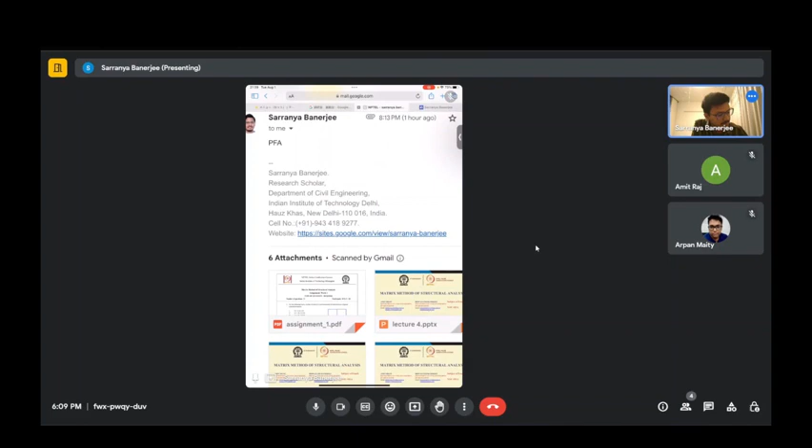First, I would like to introduce myself, and what better than my own web page that I have created. This is the web page where I have given details of what I am doing, how you can contact me, and so on. You can note this web page and try to contact me through it also. I am Sarranya Banerjee, a doctoral research scholar, Prime Minister's Research Fellow to be more precise, in the Department of Civil Engineering at IIT Delhi.

My area of specialization is structural engineering, as you might have already guessed. My research revolves around various vibration control strategies for structures against multiple hazards like earthquakes and winds. Right now I am in Toyohashi City in Aichi Prefecture, Japan, where I am conducting research as part of an exchange program between IIT Delhi and Toyohashi University of Technology, facilitated by the Suzuki Foundation.

This is my contact information. You can find my institute email ID and my personal email ID here. You can email me in case you need any information related to structural engineering, civil engineering, and academics.

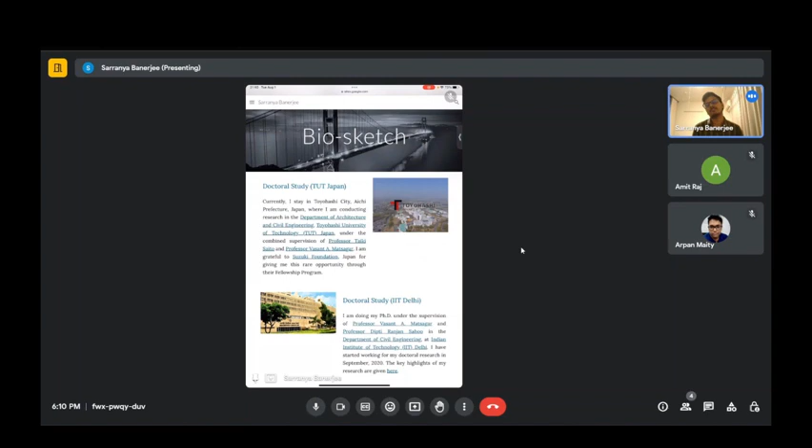This is my bio sketch. Currently I am doing my doctoral study under the supervision of Professor Vasant Matsagar and Professor Dipti Ranjan Sahoo in IIT Delhi, Department of Civil Engineering. I started my doctoral research in September 2020, and from April to October 2023, for 6 months, I am staying in Toyohashi City doing research at Toyohashi University of Technology under the supervision of Professor Taiki Saito.

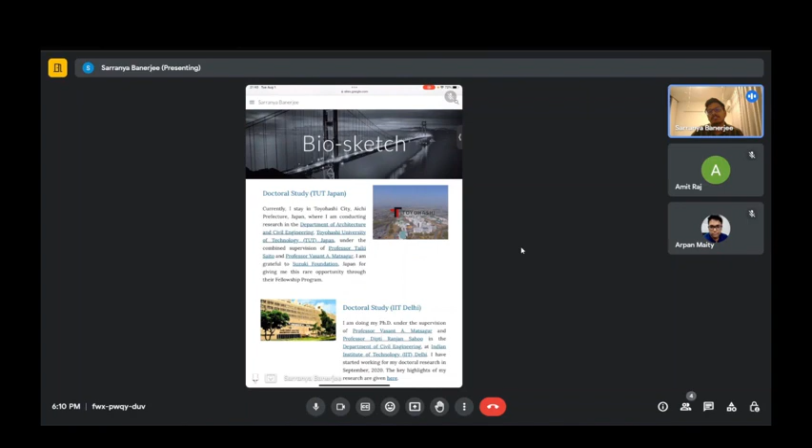I have received some awards during my doctoral study, including the Suzuki Foundation Fellowship, due to which I am currently in Japan, and the Prime Minister's Research Fellowship, for which I am conducting this online live session with you all, along with some other awards. I also have 3 journal publications and 3 conference publications so far, with some others currently under communication.

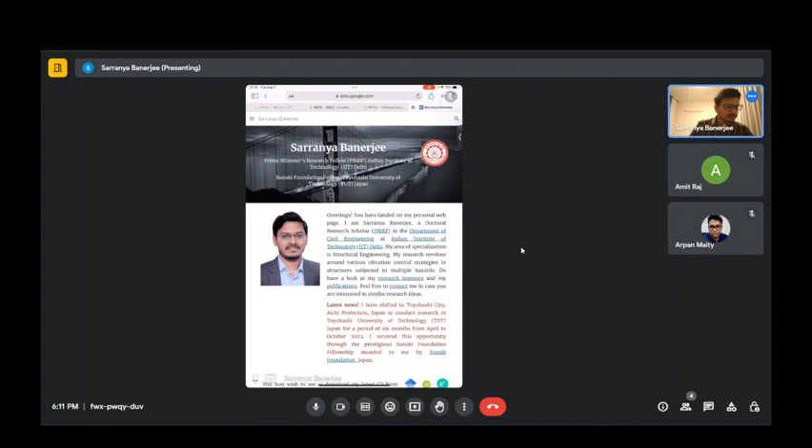My broad areas of research are structural dynamics, vibration control devices such as seismic isolation devices and tuned mass dampers, and multi-hazard engineering including earthquake engineering and wind engineering. None of this is directly related to this course; however, these are my broad areas of research, and as always, we have to be very strong in the basics of structural engineering, like matrix methods in structural engineering, to study further in these areas.

I'll stop my screen share for a moment now. I would like to speak to you about my expectations from these live sessions, and I would also like to know from where you are joining this meeting, what you are doing, and what your expectations are from this course and this live session.

As the name suggests, this is called the live interactive session for the course of Matrix Method of Structural Analysis. So the first and foremost thing in this course is that it will be very interactive. I will always be coordinating the meetings, but I would like to get inputs from your side. I will give some problems and we'll solve them together.

I expect that you have a notebook in front of you right now where you can jot down the problem and try to solve it. I'll give you 1 or 2 minutes to solve the problem, and then we'll solve it together for the whole class, so that you get an idea of where you will get stuck during solving.

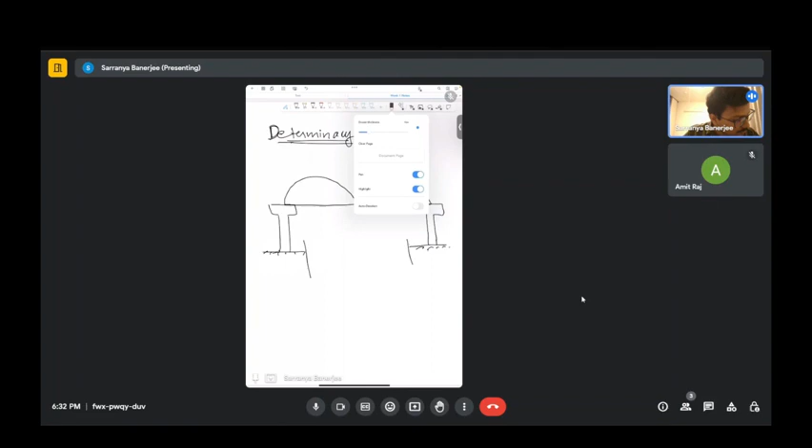Before I start explaining this beam problem, I would like to talk about this in a more practical sense of view. So this is a two-dimensional view of something I have tried to draw here. Can you tell me, Amit, what I have tried to draw here from this figure?

To make things easier for you, let's extend this drawing.

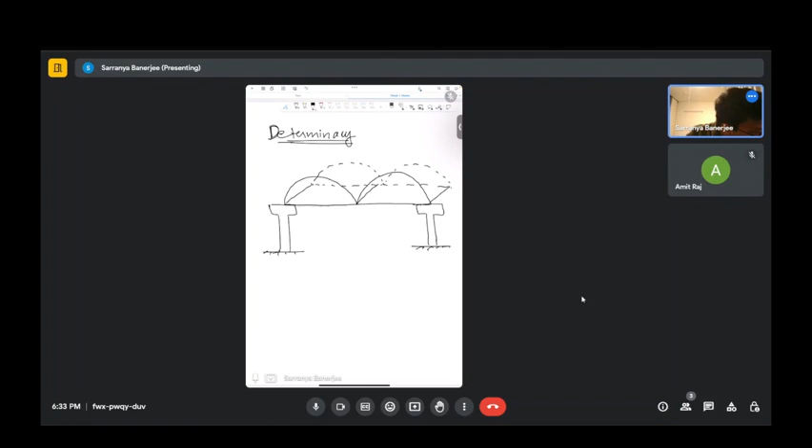Now can you guess what is the thing I have tried to draw here? A bridge structure, right? Yeah, any specific name of this bridge? Arch bridge. Yeah, this is an arch bridge. So how beautiful do you think arch bridges are? Very beautiful, right? Yes, looks very good.

Whenever we look at some arch bridge, usually the thing with arches is that they are from very ancient practices of civil engineering. So most of the arch bridges are usually very historical in nature. Nowadays very few arch bridges are made because there is a larger requirement of material. Cable bridges are much stronger than arch bridges, but arch bridges always have that historical aspect with them, that is why they are so beautiful looking. So say this is an arch bridge, right?

Yes, absolutely. So now there is a very fine detail in the arch bridge which you will find if you try to see very carefully, very closely, if you get to see any arch bridge properly. So you'd see at the end there are some rollers. You will not get to see this very often, but if you have a close, objective look, you can see there are certain rollers in bridges at some ends.

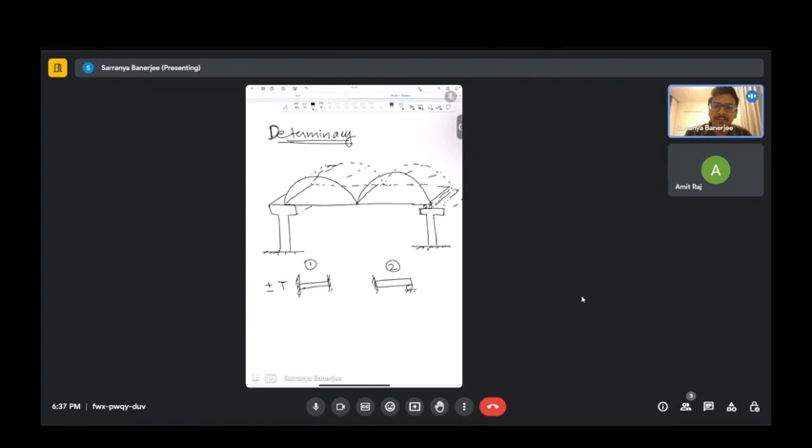So now we expose these two beams, beam 1 and beam 2, to air, like temperature loads. Sometimes we heat it, sometimes we cool it. We are doing it explicitly for these beams, but actually this is happening in a real life bridge. In the night time or in the winters it is getting cooled, in the daytime, in the summers it is getting heated. So now what will be the difference between the performance of these two beams? Which will perform better? What do you think?

The one with the roller. In which roller is provided. But why is that? Because the roller will allow deformation or movement in the horizontal direction. You're absolutely correct. It will allow movement in the horizontal direction. So if there is a plus T, say for example an increase in temperature, the beam can expand like this, and the roller facilitates that. If there is a decrease in temperature, the beam contracts like this, and the roller facilitates that too.

So now what is the problem with this beam then? Both ends are fixed. Yes, so it will not facilitate the contraction and expansion. So a crack may develop, or something else may happen. Absolutely correct. So if we take the free body diagram of this beam, or even this beam, both beams...

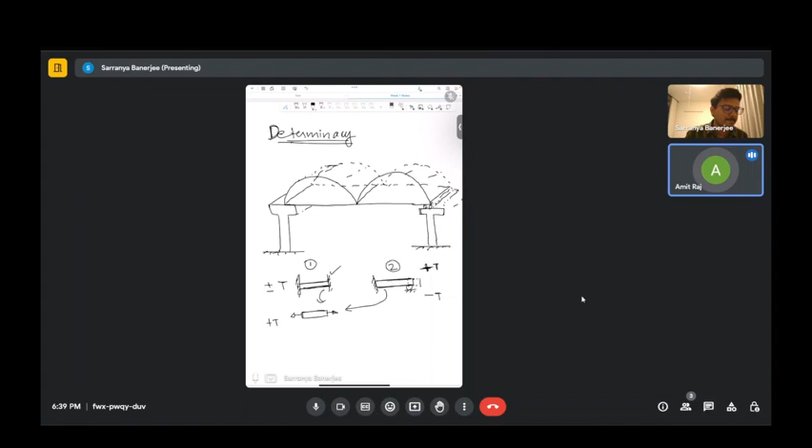So if it is exposed to say plus T, an increase in temperature, there will be a tendency for this to expand in the axial direction. Why the axial direction? Because thermal expansion will occur in the longitudinal direction, along the longitudinal direction. Exactly. So since this is a beam structure, this is a longitudinal member.

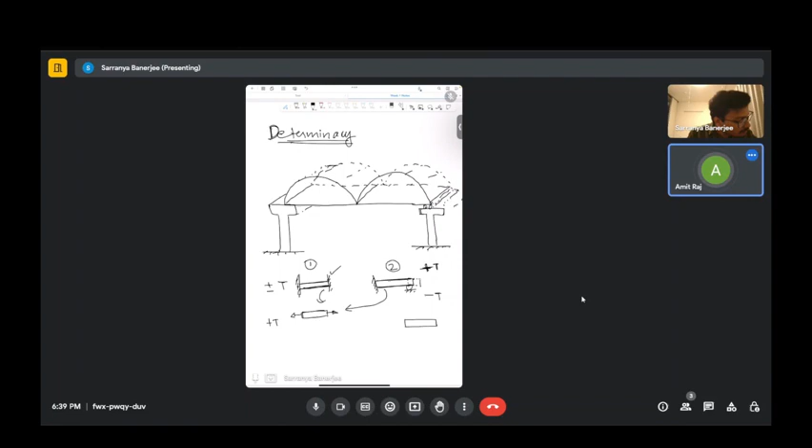If we heat a longitudinal member, it will expand in the axial direction. If this would be a plate, a planar member, it will expand in both directions, 2D. Similarly, if it is a cube, it will expand in three directions.

So now the beam is getting expanded in the longitudinal direction due to the temperature change, but these fixed joints are actually resisting this. When this resistance happens, lot of stresses get developed in this region.

What is stress? Stress means the internal resisting force per unit area. So now if there are some forces being developed here due to the rise in temperature, there will be stress developing here, which will actually impact the axial resistance of the beam.

So the beam has to be made stronger to carry these extra loads, which is not required in this case, because there is no horizontal force acting in this area. So there will be no stresses required in this area, and similarly the stresses here is also reduced because it is free to expand in one direction.

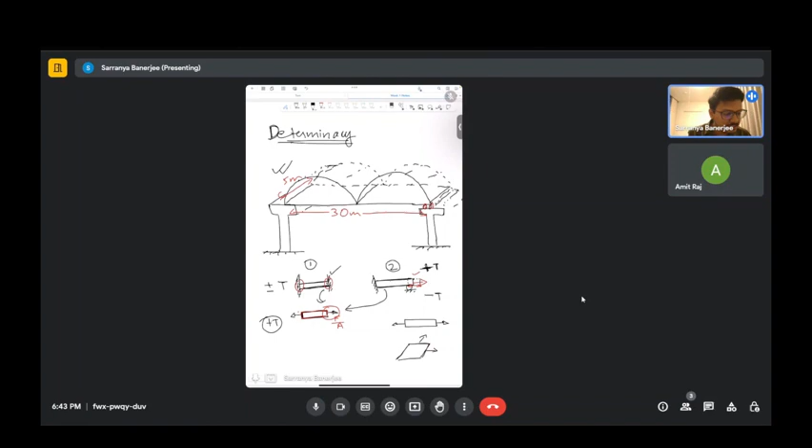So now we are idealizing this as a longitudinal member, and here we are making this as a pinned support, and here we are making this as a roller support. So now what kind of loads will be acting on the bridge?

The first load would be the dead load of the bridge itself. Second, live load and dynamic load due to various loads due to the vehicle. Say this vehicle is a big truck vehicle which is moving on the roads, so this will have a very big load. Then a small vehicle, a small load. So there are various loads on the bridge, right?

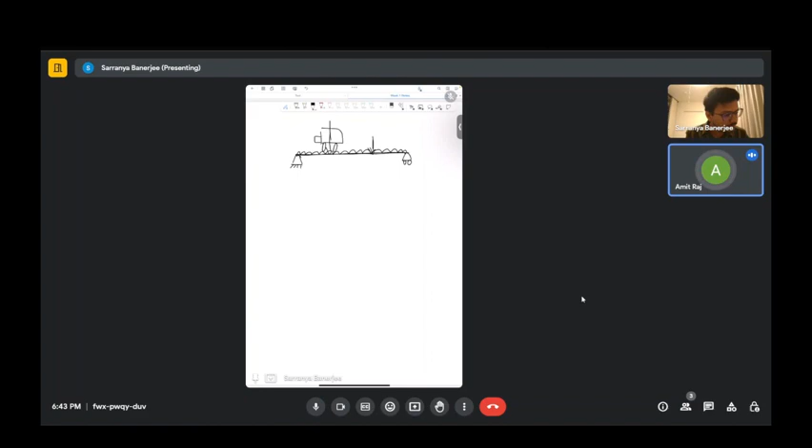So now we have already understood that this is an idealized representation of a simply supported bridge structure where we have various loads acting on the structure. Now, as a designer, when you want to design the bridge, you have already idealized this from the point of view of structural analysis. But as a designer, what do you want to know about this bridge due to these specific loads, so that you can design the bridge?

What? Yeah, I'll repeat my question. So, have you already completed the reinforced concrete design course or any steel design course in your curriculum? No, not yet. But I think in the current semester you will be having the reinforced concrete design course, right?

Next semester? Fifth or sixth semester? Currently, I'm in fourth semester. Yes, sure, no problem at all.

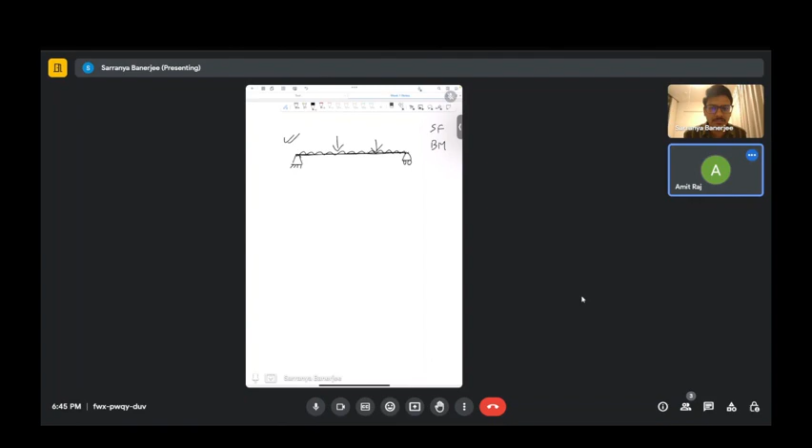So now let's first understand the designer's perspective to designing structures. Right now we only have knowledge of how to analyze the structure and find forces, shear force and bending moment, right? But why are we interested in shear force and bending moment? That is not yet clear to us. So let's go a little bit back to basics of the design of structures.

So now I have already idealized this structure as a...

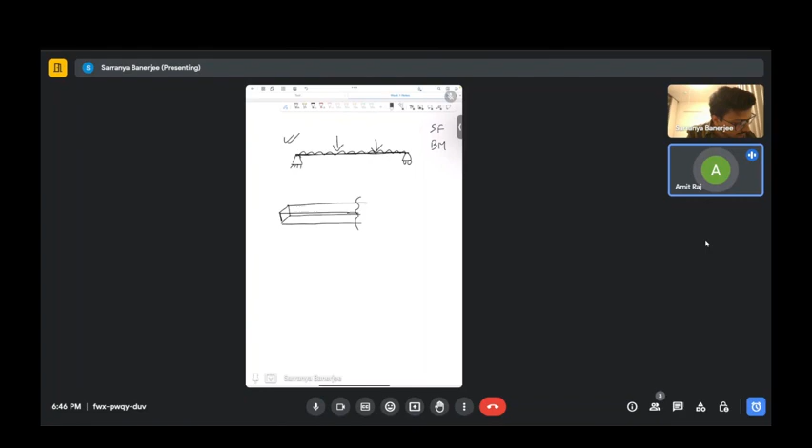Sir, you are currently in Japan. Yes, currently I'm in Japan. Right now the time here is 10:15 in the evening, in the night.

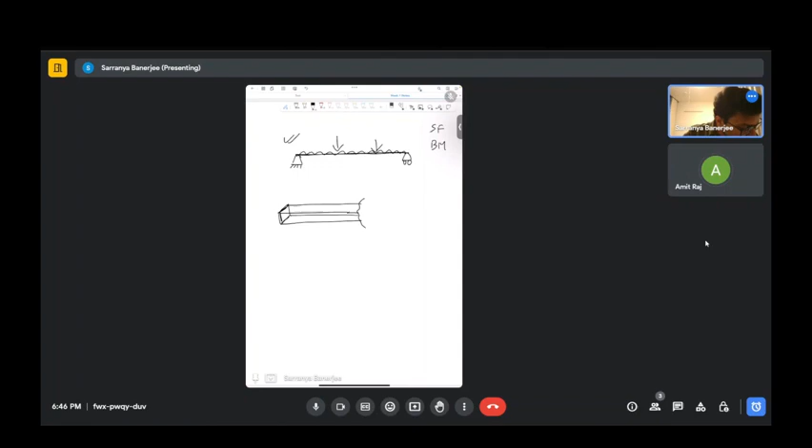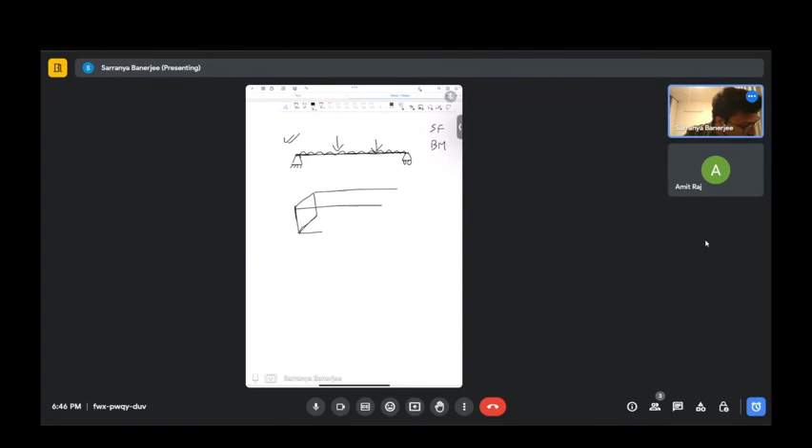So anyways, coming back to our discussion, I'll just draw this again. I'll draw a bigger section of the beam. So this is a beam section, right? A rectangular beam section, do you agree? Yes. So first, for structural analysis, we have idealized the longitudinal section to a single bar kind of element, right?

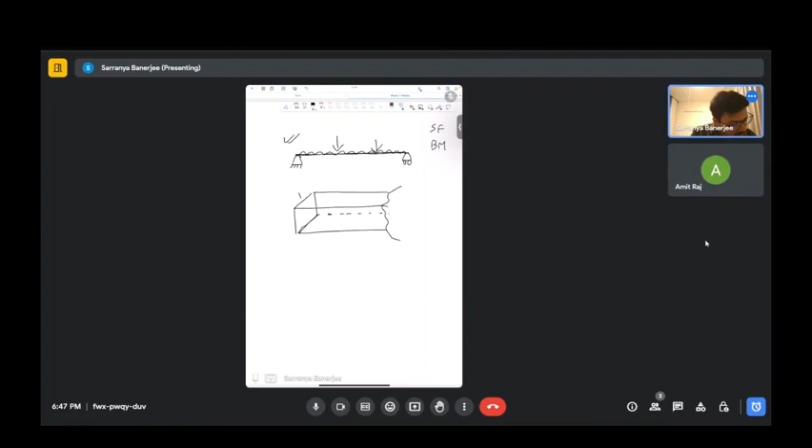Yes. But now for structural design, I want to move one step backwards, and I want to know what are the dimensions of the beam. What is its length? What is its depth? Depth of the beam and width of the beam. I want to know that.

Now why do I want to know that? So we were talking about calculating shear forces and bending moments, right? So how does shear force act on the beam? Any comment on that? Parallel to cross section. Parallel to the cross section. Excellent, yes.

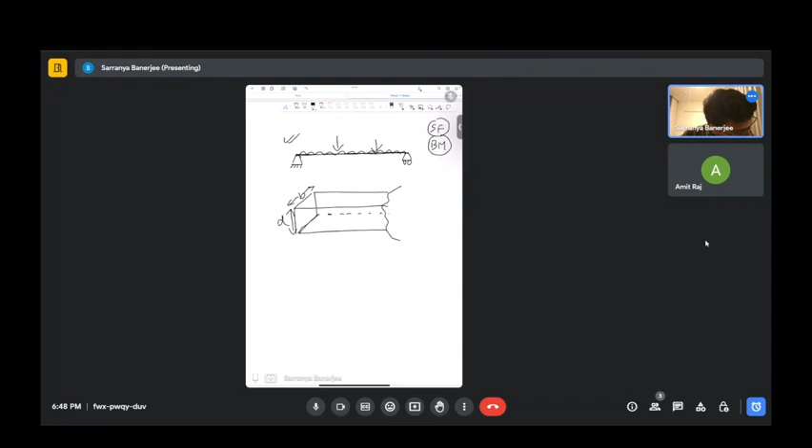So say we cut, say we only see this face of the beam here. Which face? This front face of the beam, front view. So now what we see here is this is D, the depth of the beam, right?

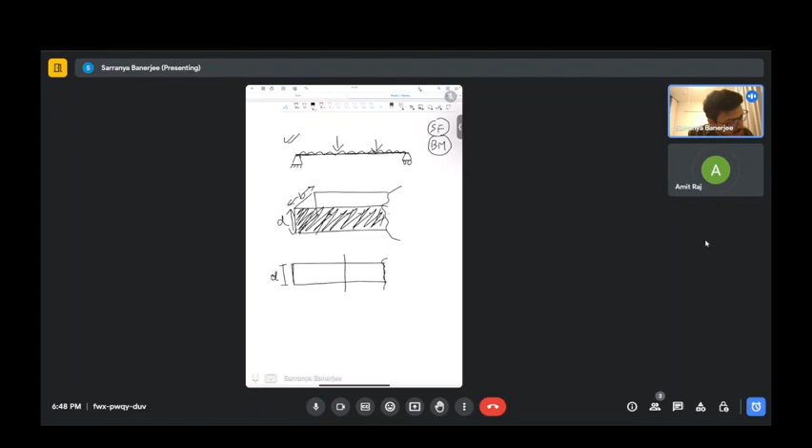Yes, so now we cut a section here, and the shear force in this beam acts parallel to the section, parallel to the cross section. So what does that actually mean?

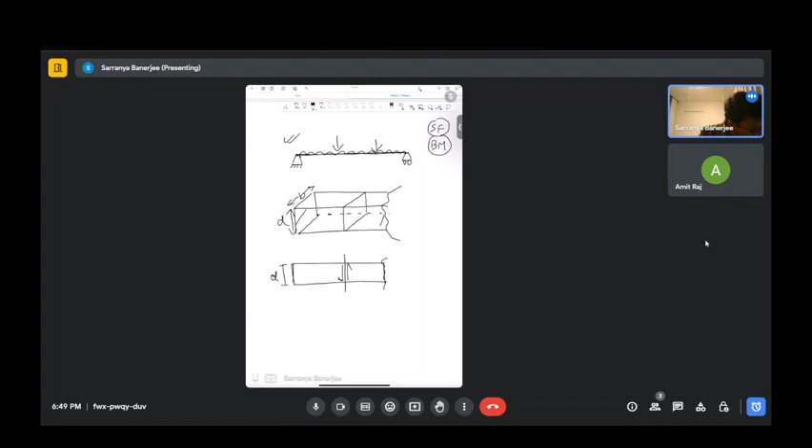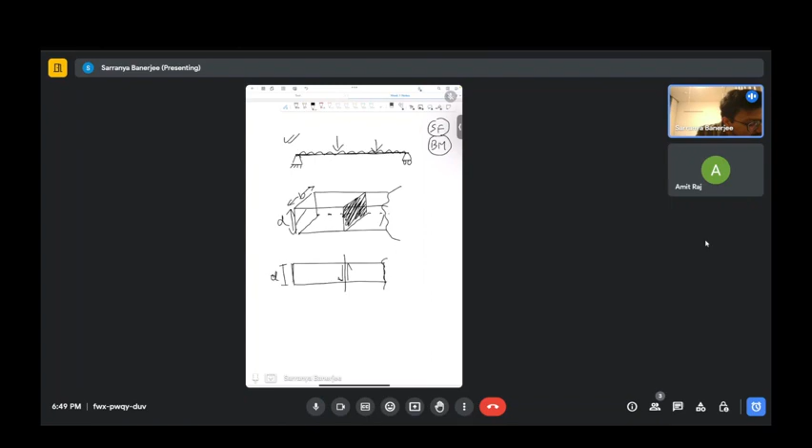Let's see this, what does that actually mean? So now that actually means that this cut section is actually this cut section because there is a width to the beam. So now I get it, this section has a force acting on it like this from two sides.

Yes, shear force. So now how will I decide this width of the beam and this depth of the beam? Any idea? So say you are designing a structure, let's start with a very simple beam, only uniformly loaded, and then you want to design this beam. So how will you decide the depth of the beam or the width of the beam?

How to decide that? By finding shear force acting in the beam and bending moment acting in the beam, then we can design accordingly. Exactly, very good. So unless we know the shear force at this section of the beam, we don't know what will be the correct depth and width of the beam.

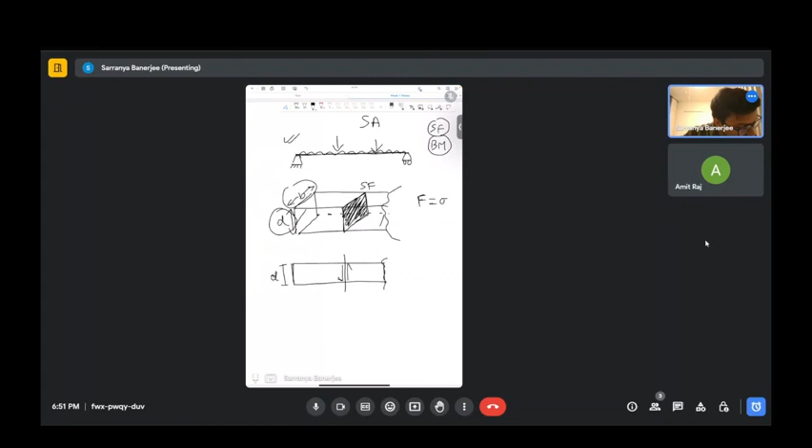And why I am saying this is, say the shear force is F, which we now know because of the structure analysis course, which has shown us how to calculate the shear force. So now if we have the shear force F, it will be equal to certain shear stress into certain area, and this area would be equal to B into D.

So how do we know the shear stress? The shear stress depends on the material you are using. If it's a plastic material, the shear stress would be something; if it's concrete, it would be something else. So shear stress directly depends on the material. When you design a beam, you first decide the material - whether steel or concrete - and that material information gives you the shear stress value.

Now how will you decide the width and depth of the beam? Through this area A. And how will you decide this A? Because of the shear force, right?

So now I hope you can connect why we are calculating the shear force of the beam. For designing purposes, exactly, for the designing purpose.

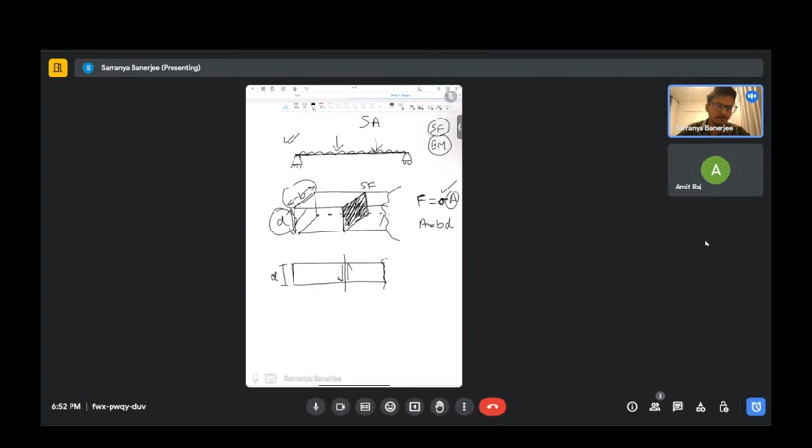It's about how you make this computationally possible, through the use of different stiffness matrices, etc.

Now coming to the bending moment - again, why it is important is how does a bending moment act on a structure. In this section the bending moment will act like this, something like this maybe. So now, this is the cross section I have taken down here.

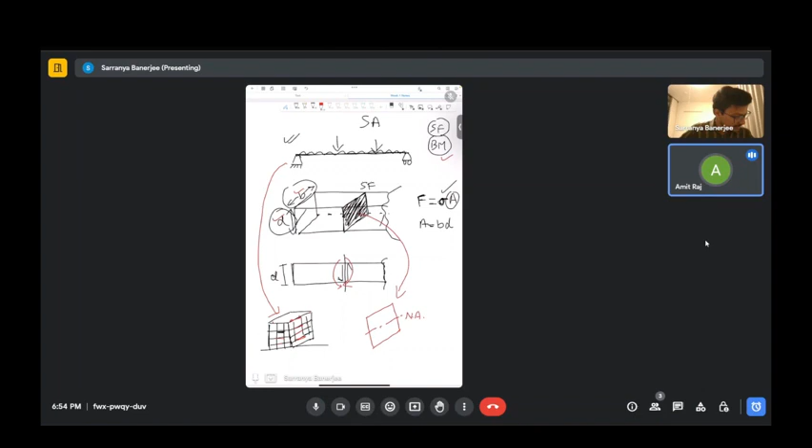Bending moment is the result of bending stress developed in the beam. Bending stress is nothing but normal stress. In the top fiber, above the neutral axis, tension will develop. Below the neutral axis, compression will develop. So this will form a couple, and to resist that couple, bending moment will develop. I am very happy to know that you have your basics covered very nicely - this is exactly what happens in bending stress.

So now a portion of the beam is actually in compression or tension, and the other portion is in tension or compression. So how do you decide the depth or width of the beam? By calculating the bending moment and then computing it with the bending stress, right? This is how you design structures.

Okay, so I am kind of diverting from your original question - we have not yet discussed what determinacy is. But at any moment if you feel I should come back to the topic and not discuss these things, please tell me. There's no problem. Okay, you can be free, no problem at all. You just carry on as your wish. Yes, yes, thank you, thank you.

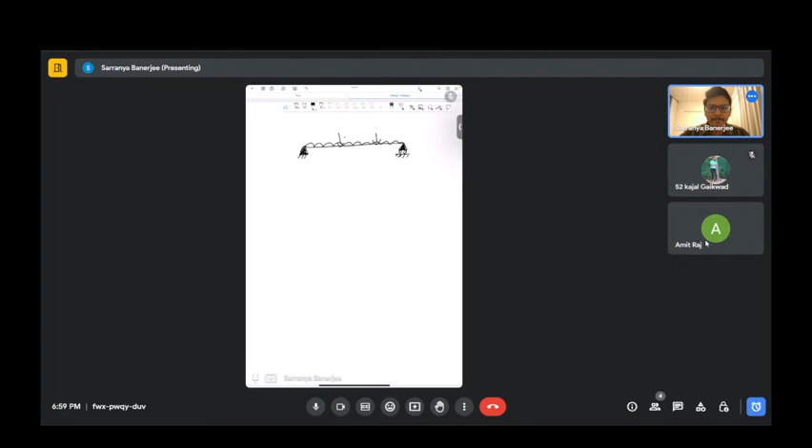So this is a simply supported beam, which is idealized from the arch bridge type of structure. Now this simply supported beam, I would ask Amit, what do you think - is this a determinate structure or an indeterminate structure? This is determinate structure.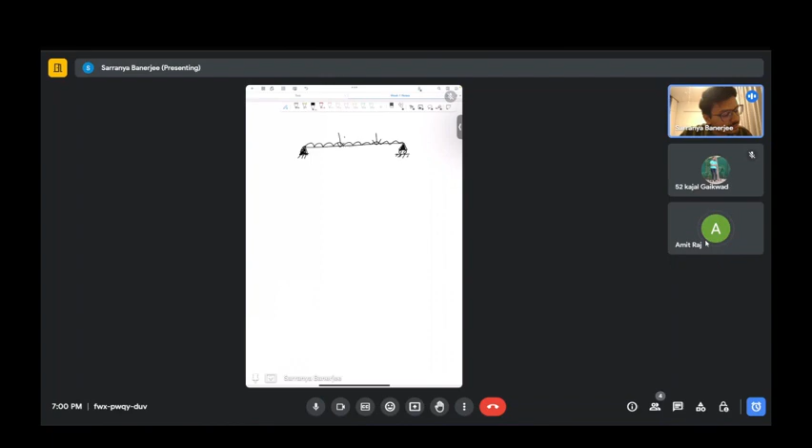You are right, this is a determinate structure, but what makes it determinate? How do we actually analyze structures? First, to understand whether it is determinate or not, we have to think about what we are actually trying to determine from the structure. The first thing we are trying to determine from the structure is the shear force and bending moment. Why are we trying to determine the shear force and bending moment?

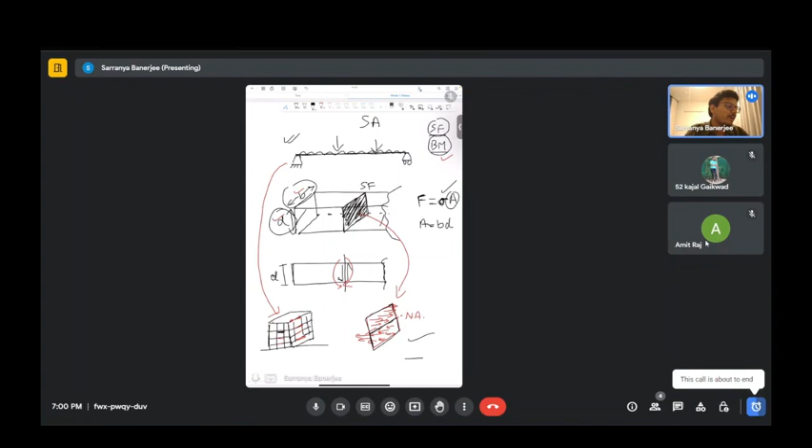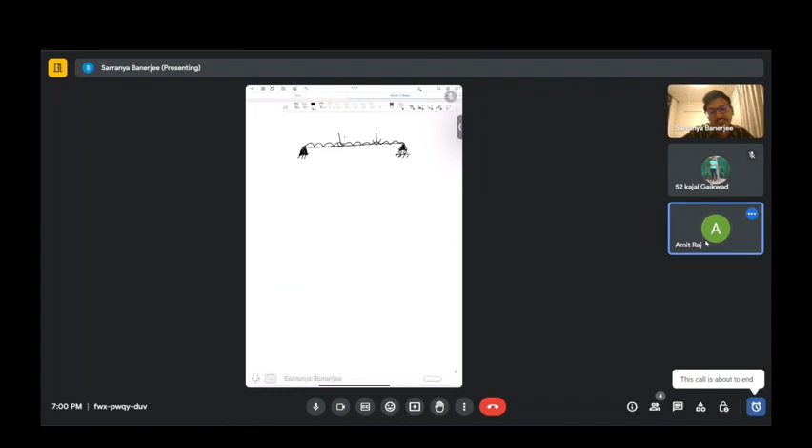To design the structure, to actually build the structure on that river, right? To actually build the bridge on that river, we want to know the shear force and bending moment.